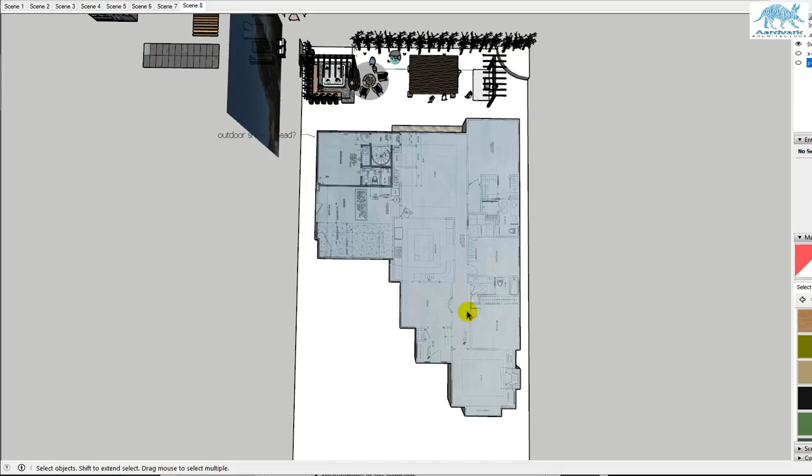Hey guys, let's do a quick run through of the outdoor spaces that we explored together. This is still pretty rough without the final survey information, but it's good enough for our purposes. So here's your existing floor plan to orient you.

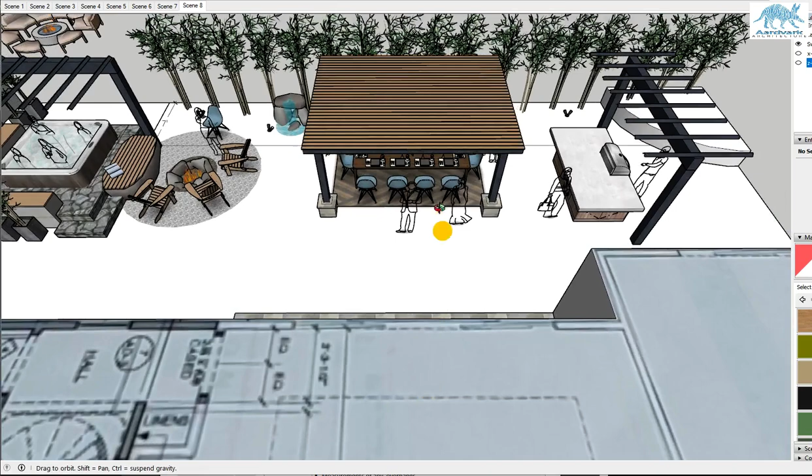Let's drop down inside the family room. Looking at the doors you have there, we'd see the covered pergola space completely centered on the doors here. I think that's very important.

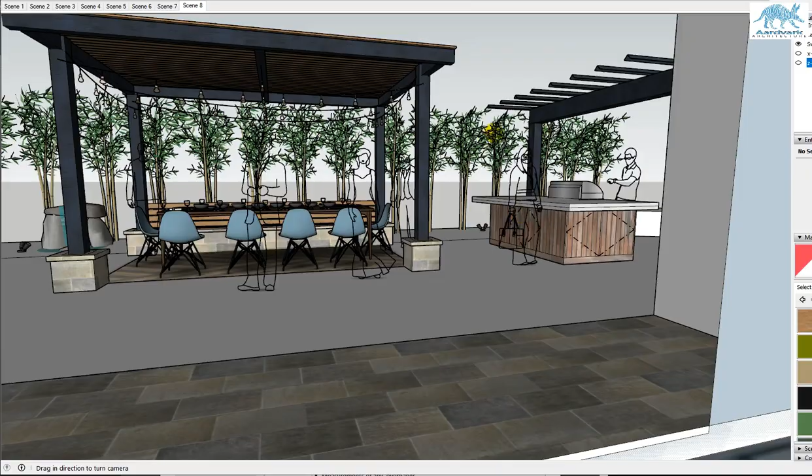Approaching the doors, we'd get a view of the hot tub space beyond and the optional barbecue zone. And we come out here. This is the version we looked at and mocked up today, which had the posts moved in to about 8 feet apart, leaving more space between the posts and the existing house, but still with an overhang here, which I really like.

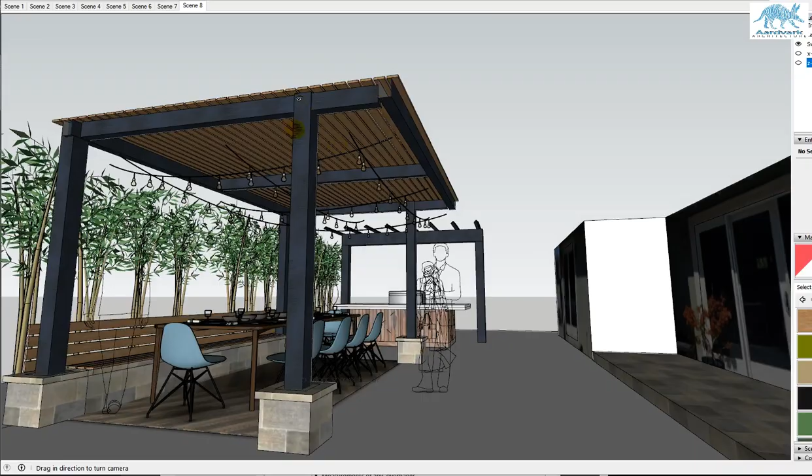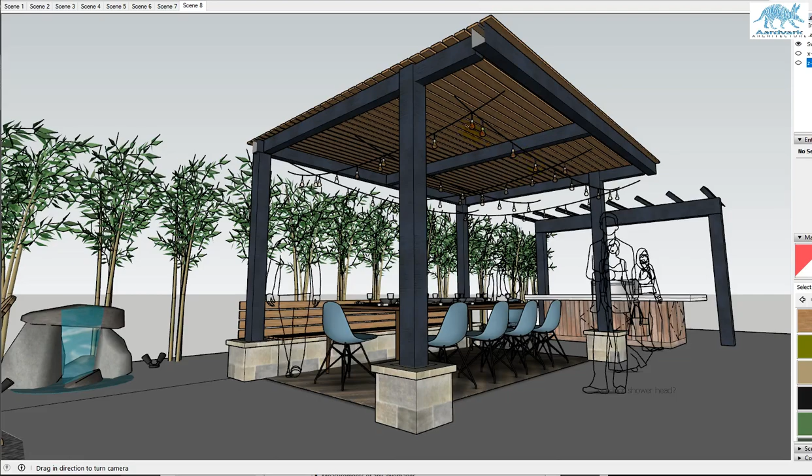We can iterate on exactly how this looks, and it's also really rough right now, but in terms of key elements: four posts, the post base at the back turning into a bench, and a very light steel structure with a wood slat top piece for the pergola. It'll let dappled light in.

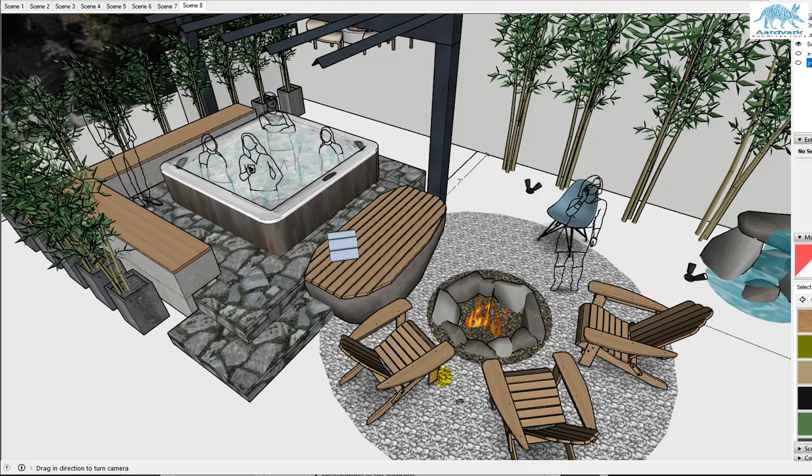I'm showing a sunken fire pit here, powered by a natural gas line. It's possible we could incorporate a propane tank cabinet somewhere here. Maybe that could work, I'm not quite sure the nuances there, but certainly going with the natural gas and having the key or control over here would be great.

I'm showing an organic paving stone surrounding the hot tub with a concrete wrap, poured in place, with a wood cap on top.

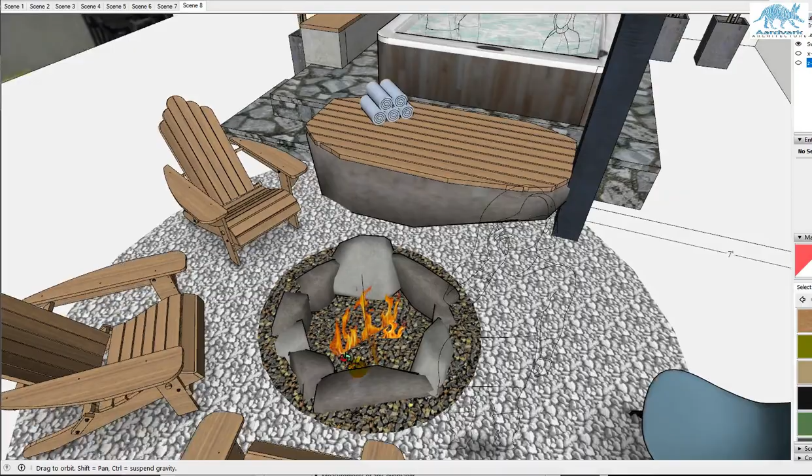I'm also showing the sunken fire pit is meant to be ringed in natural stone, and hopefully you guys will be able to find a very big special boulder that we can build some sort of flat piece on top. It's got to have a relatively flat side, but this could be something very special.

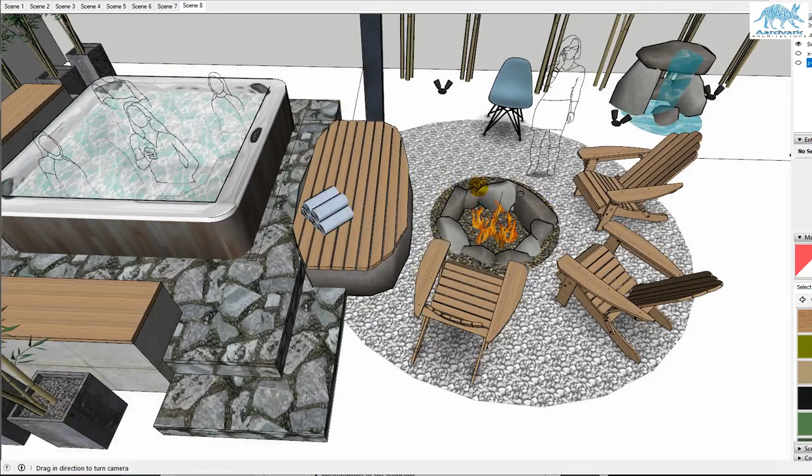If we can't find a boulder that's right, this could certainly be done out of poured in place concrete in an organic shape. But finding a boulder that matches the language of the fire ring would be really, really cool.

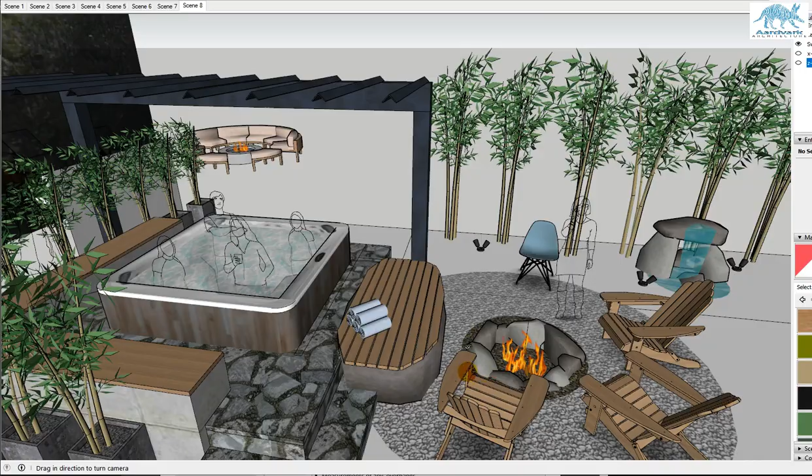We talked about how this rock and deck platform is meant to bridge these two spaces together. Someone could definitely be laying out on this on a towel or a foam pad, part of the hot tub party, or swing their legs around, dangle their feet down here, and warm up by the fire.

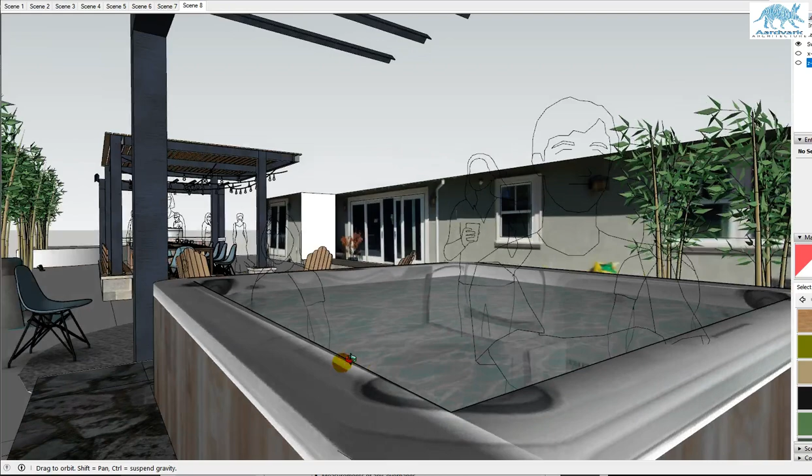I'd say doing the same twinkle lights, which I haven't really modeled up yet, hanging off of these steel angles welded over here, just really does something special for defining this space. And Rich, like you were saying, it gives you something to look at overhead rather than all the wires and the neighboring structures.

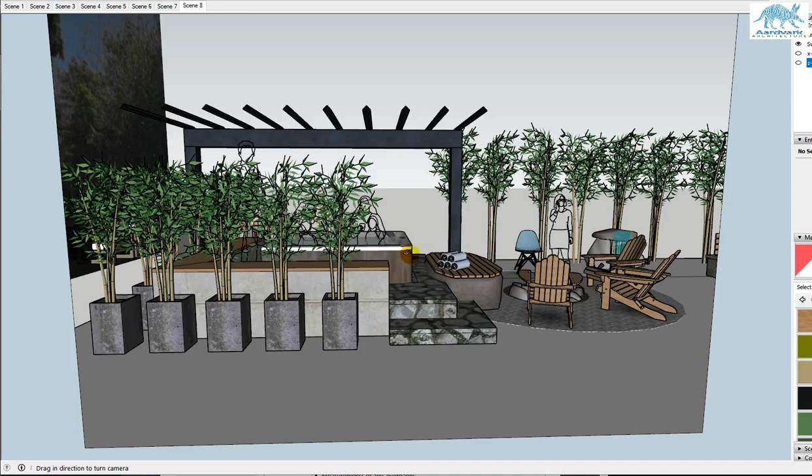Viewed from this bedroom here, I think it's also really, really nice. That's a very nice thing to sit at your desk doing homework, looking out on a space like this. Hopefully it won't be too much of a distraction away from doing that work, though.

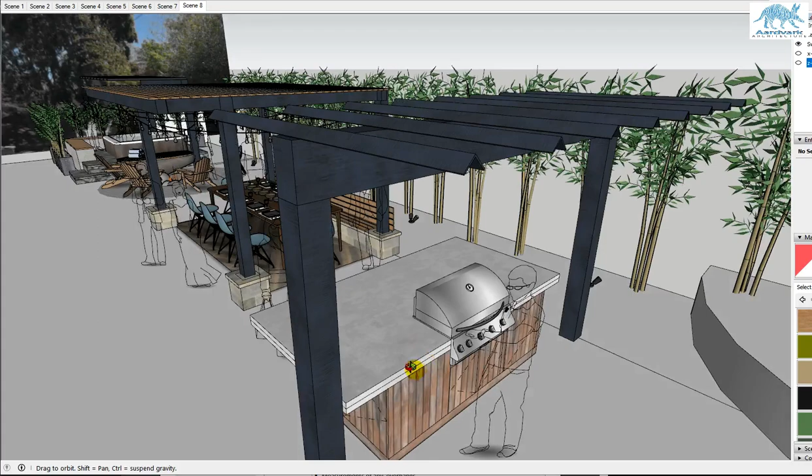I know this is a bit on the fence right now, on the table as to whether or not we also define the barbecue zone, but I like it. I certainly like having the three defined roof elements, but it wouldn't change what I'm doing here.

This is again snapped to the center line on the doors, which is really important. So whether this is left open for other activities, future expansion, or volleyball practice, I get that, and I think that certainly warrants some careful consideration.

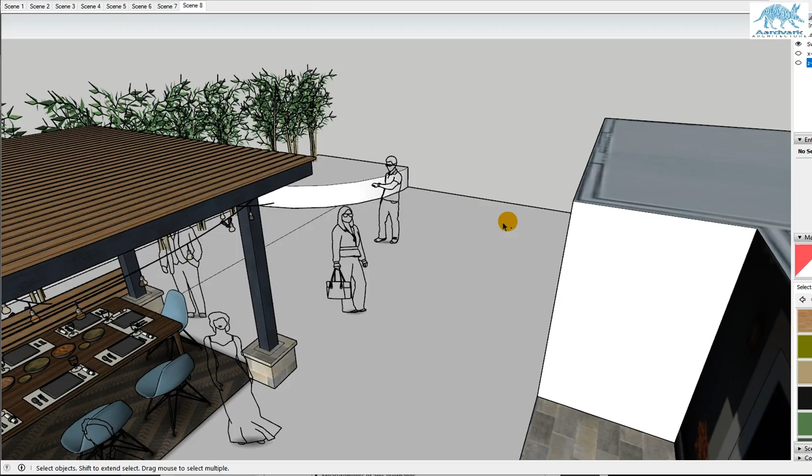But if you do want to design or incorporate an outdoor kitchen with a barbecue zone and a big gathering spot countertop for laying out a buffet or work stuff, plus all this storage underneath, I think this could be a very special element and a very commanding way to cook in the outdoors.

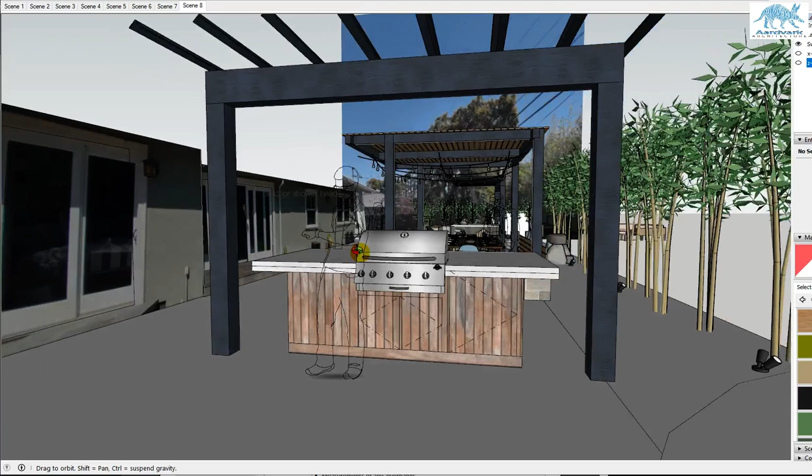So I'm very curious to hear everyone's feedback on this. Obviously there's so much room for change here and tweaking. Let's plan on reviewing your thoughts at our next weekly meeting. Okay.